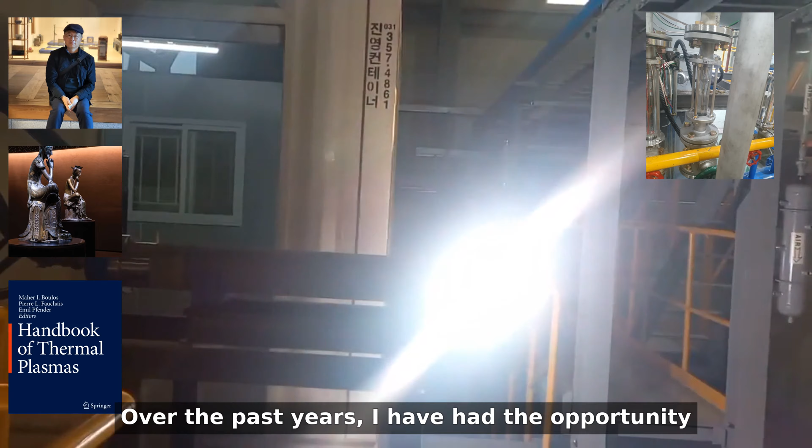Over the past years, I have had the opportunity to design and operate a high-power arc plasma smelting system based on a 700 kilowatt, 22,500 volt direct current arc plasma configuration. This system was successfully deployed in the Republic of Korea, where platinum group metal-bearing ores were directly smelted using plasma energy.

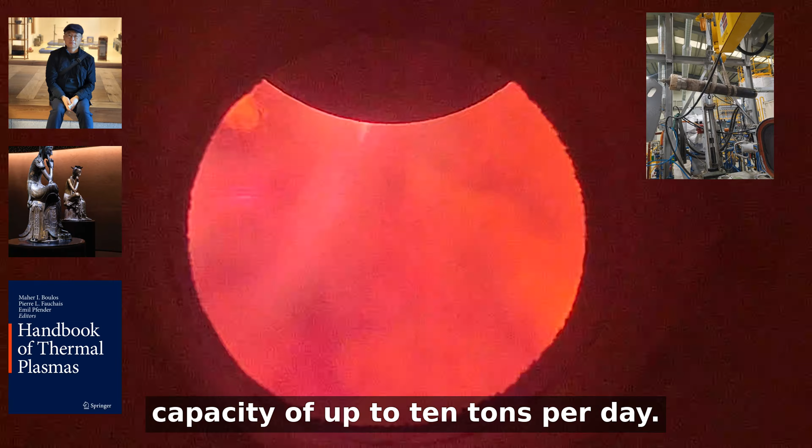Unlike conventional batch melting processes, the system was engineered for continuous smelting operation, enabling a designed processing capacity of up to 10 tons per day.

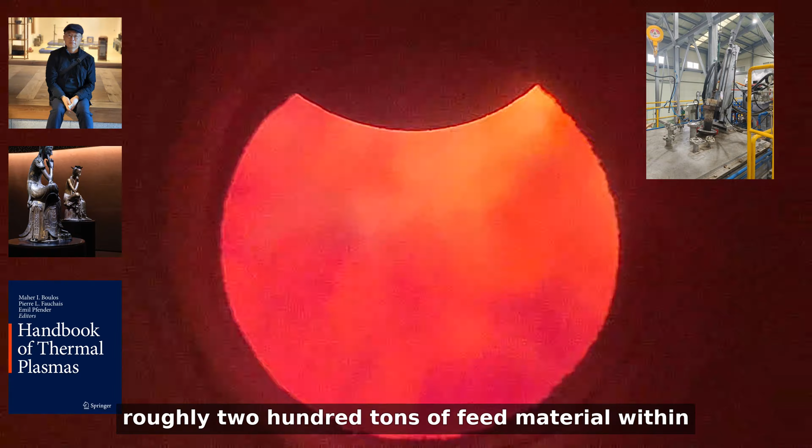The furnace was operated in campaigns of approximately 20 continuous days per month, demonstrating the capability to process roughly 200 tons of feed material within a single operational period and produce concentration-enriched PGM ingots.

While large-scale commercial production still requires further investment and expansion, the technical feasibility has already been validated.

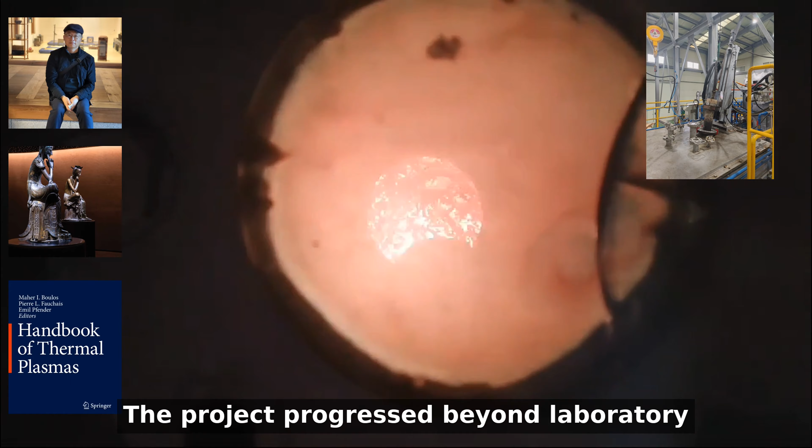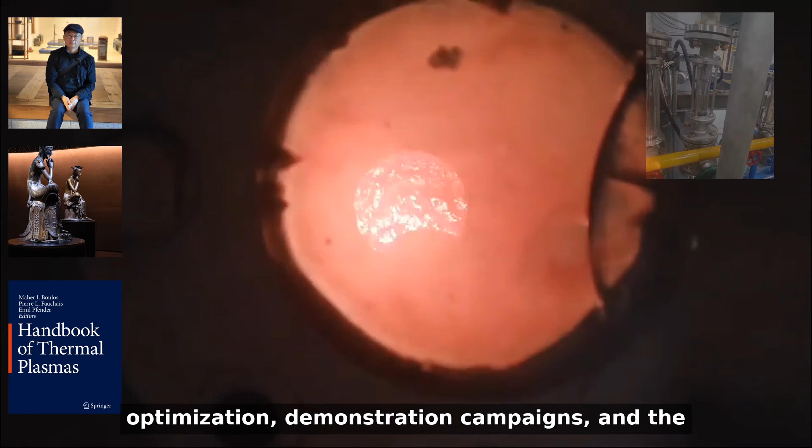The project progressed beyond laboratory experimentation into pilot industrial operation, including plant construction, system optimization, demonstration campaigns, and the successful production and sale of approximately 100 kilograms of PGM ingots.

This experience confirmed not only the scientific validity of plasma smelting, but also its practical industrial potential.

Building upon these results, my current focus is the design of a fully robotic, mobile, and modular plasma smelting system. The objective is to create scalable metallurgical platforms that can be deployed rapidly, operate autonomously, and dramatically reduce infrastructure constraints traditionally associated with high-temperature refining facilities.

With the collaboration and support of entrepreneurs and investors around the world, this technology has the potential to fundamentally change how critical metals are produced.

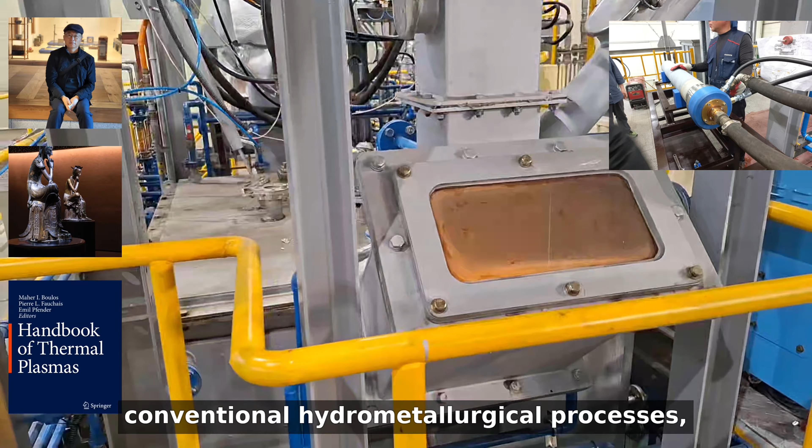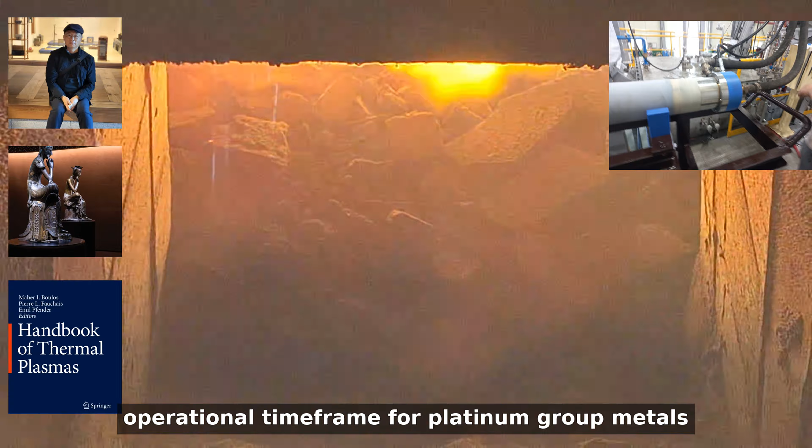Without relying on chemical reagents and avoiding the environmental burdens of conventional hydrometallurgical processes, plasma smelting may enable production rates that are at least 10 times, and potentially up to 100 times, greater within the same operational time frame for platinum group metals and rare earth elements.

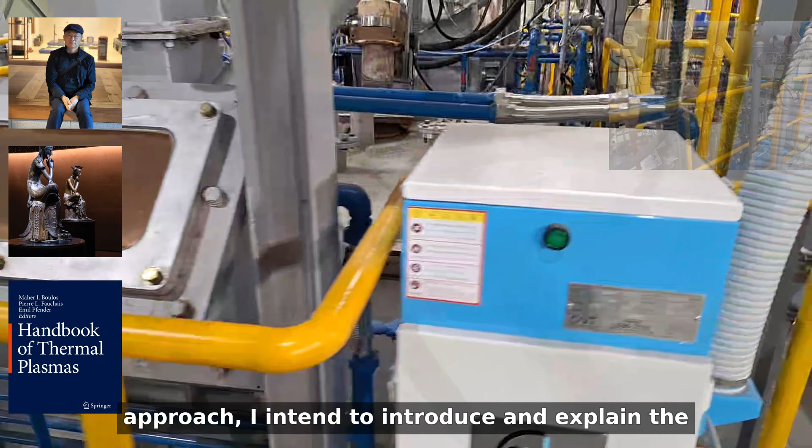To help a broader audience understand the scientific and industrial foundations of this approach, I intend to introduce and explain the technology based on the principles presented in the Handbook of Thermal Plasmas, making its possibilities accessible to engineers, investors, and curious minds alike. The material may appear highly technical at times.

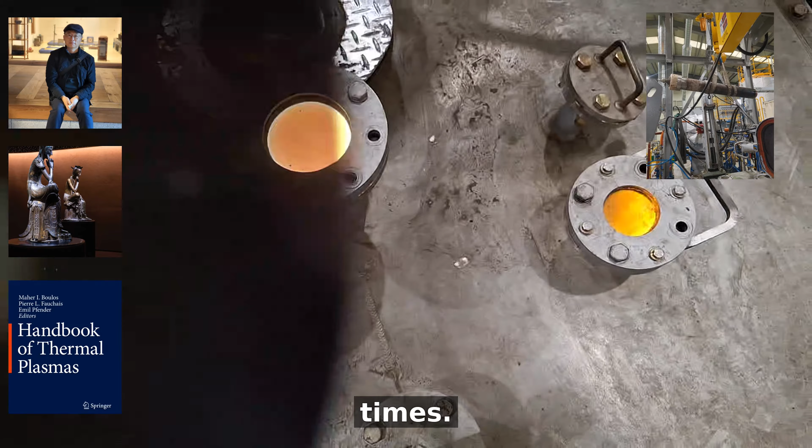Nevertheless, I hope readers will revisit it more than once and find the process both rewarding and intellectually enjoyable as understanding deepens. If this vision resonates with you, I warmly invite your interest and communication.

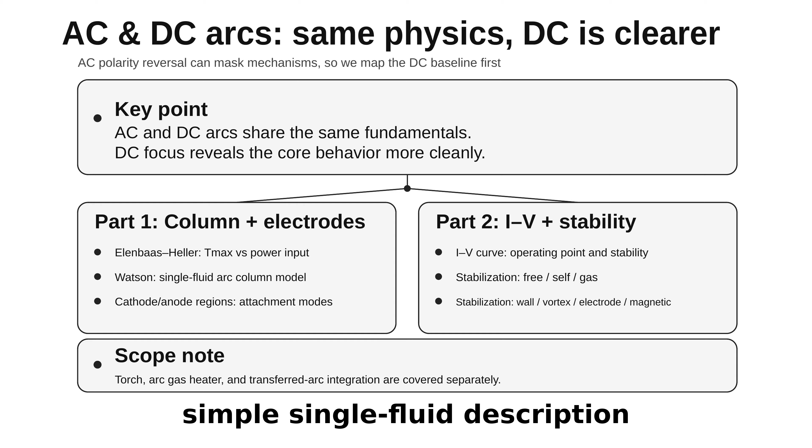Part 1 of this video focuses on the arc column and the electrode regions. The Elenbaas-Heller model helps extract trends, including feasible maximum temperature versus power input. The Watson model provides a simple single-fluid description of arc column behavior, but is not introduced here for simplicity. This part also separates cathode and anode regions and highlights different current attachment mechanisms.

Part 2 shifts to the current-voltage characteristics and electrical stability. The IV curve ties the operating point to stability and control choices. Stabilization options range from free-burning and self-stabilized arcs to gas, wall, vortex, electrode, and magnetic stabilization.

Finally, integration into plasma devices such as arc gas heaters, plasma torches, and transferred arcs is treated as a dedicated follow-on topic.

This slide sets the baseline for understanding the arc column and the electrode regions in a thermal arc. In the arc core, the plasma state generally approaches local thermodynamic equilibrium, meaning both kinetic and chemical equilibrium are reasonable approximations.

The main departures from local thermodynamic equilibrium are expected at the arc fringes and in regions influenced by a cooled wall. When the arc operates in a high-intensity regime, the conditions commonly include currents above 100 amperes and pressures above 10 kilopascals. Under these conditions, the arc behaves closer to a thermal plasma in the classical sense. As pressure drops, the electron temperature and the heavy particle temperature can diverge, and the arc becomes more non-equilibrium.

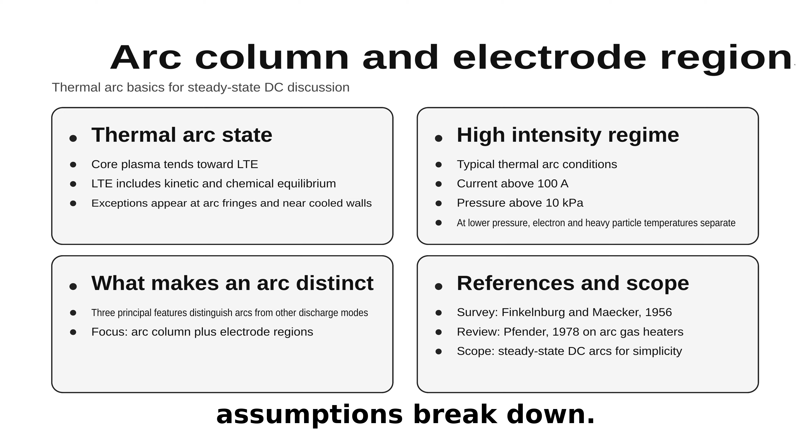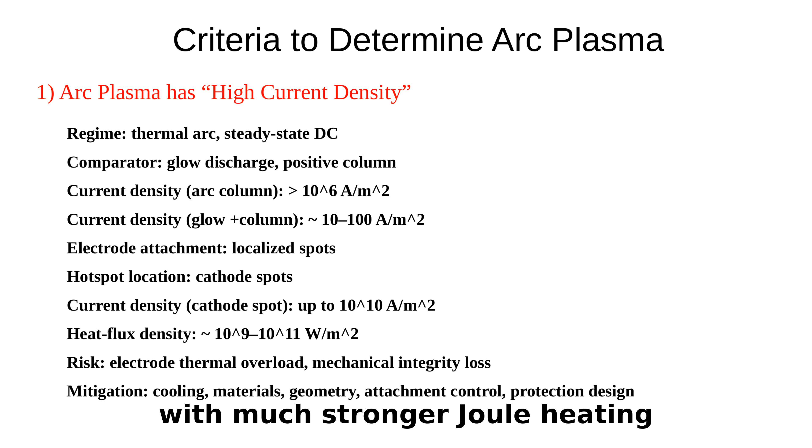An arc is a high current density discharge, and that intensity becomes most extreme at the electrodes. The current density in the arc column can exceed 10 to the 6th amperes per square meter. That number matters because it is not a small increment over other discharges. It is a different regime of energy delivery into the plasma, with much stronger Joule heating and stronger coupling between the electrical circuit and the thermal state of the column.

The comparison baseline is the positive column of a glow discharge. Typical glow positive column current densities are around 10 to 100 amperes per square meter. So even before looking at electrodes, the arc column already sits orders of magnitude above the glow regime.

Then the electrode attachment makes the contrast even more pronounced. An arc can attach to an electrode, especially to the cathode, as tiny spots rather than as a broad uniform contact area. When the same current is forced through a very small attachment area, the local current density can rise dramatically, reaching about 10 to the 10th amperes per square meter in those cathode spots. That localization immediately translates into extreme thermal loading.

The associated heat flux densities can sit around 10 to the 9th up to 10 to the 11th watts per square meter. At those levels, the electrode is not just getting warm. Without design precautions, the electrode can lose mechanical integrity through melting, erosion, cracking, or structural weakening.

So the practical engineering consequence is straightforward. If a device relies on arc attachment at electrodes, the electrode design and its cooling, materials, geometry, and attachment control must be treated as a primary reliability problem, not as a secondary detail.

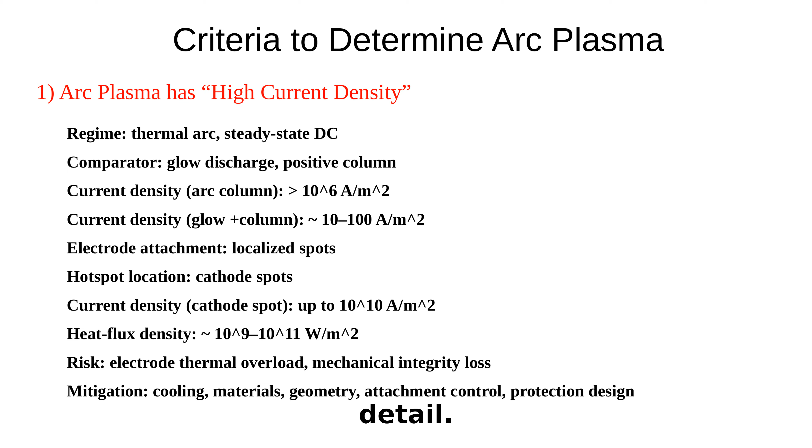For an arc, the cathode fall is around 10 volts, whereas glow discharges typically show cathode falls above 100 volts. This relatively low cathode fall follows from more efficient electron emission mechanisms at the cathode in an arc.

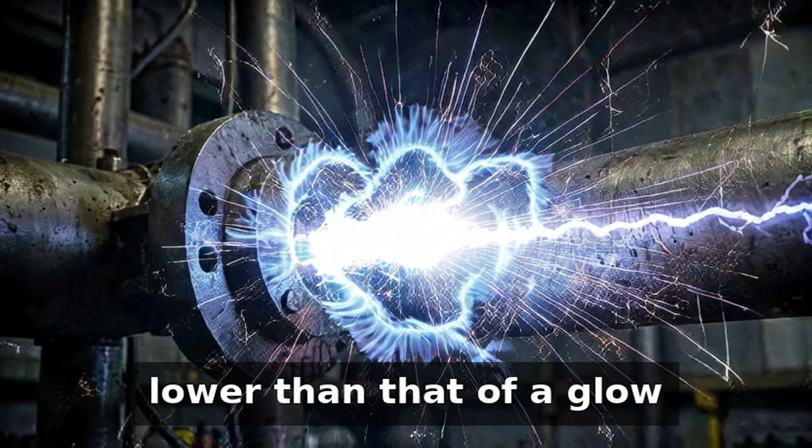Even if the overall arc voltage in a given discharge vessel is lower than that of a glow discharge in the same vessel at the same pressure, the total voltage drop is not a reliable criterion. Depending on arc length and the energy balance of the arc column, the overall voltage drop of an arc can still be very high.

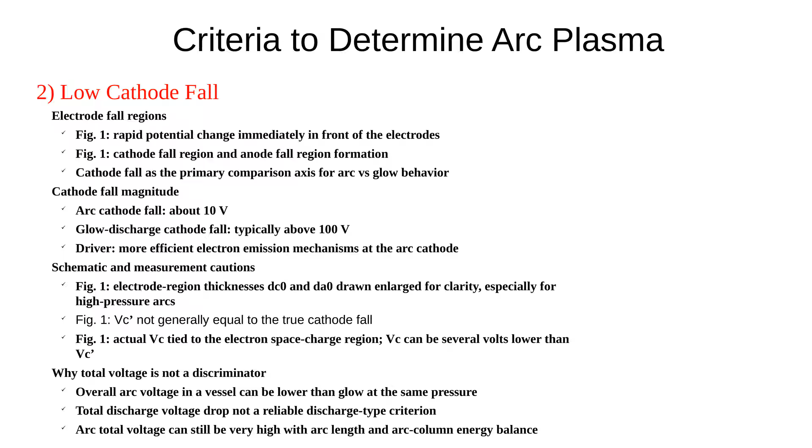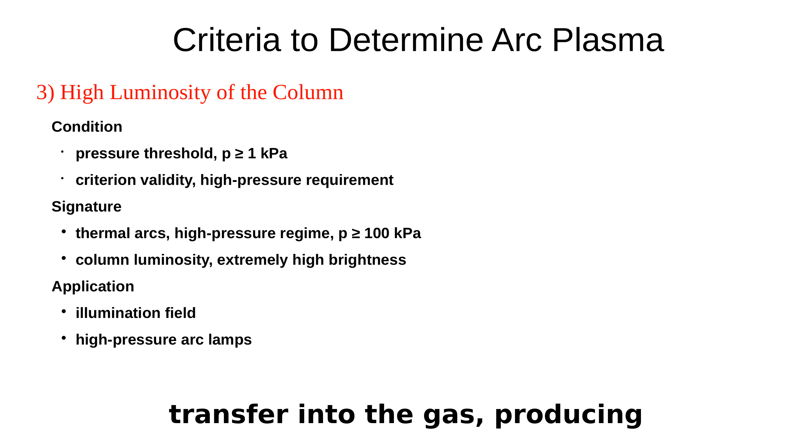At sufficiently high pressure, column brightness becomes a reliable way to tell an arc apart from other discharge modes. The key requirement is pressure P at or above 1 kPa. Pressure matters because it sets the gas density, and gas density controls how often particles collide. More collisions make it easier for electrical energy to transfer into the gas, producing strong excitation and light emission that a human eye can clearly notice.

In the high-pressure thermal arc regime, roughly P at or above 100 kPa, the arc column can become extremely luminous. Thermal arc means the plasma is strongly heated and behaves closer to a thermalized state than low-pressure discharges. In simple terms, the arc column becomes a very bright, concentrated light source because excited atoms and ions relax and emit radiation efficiently under frequent collisions.

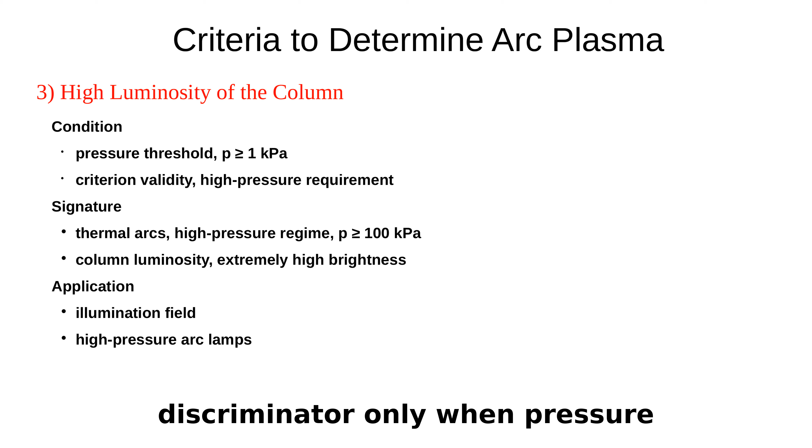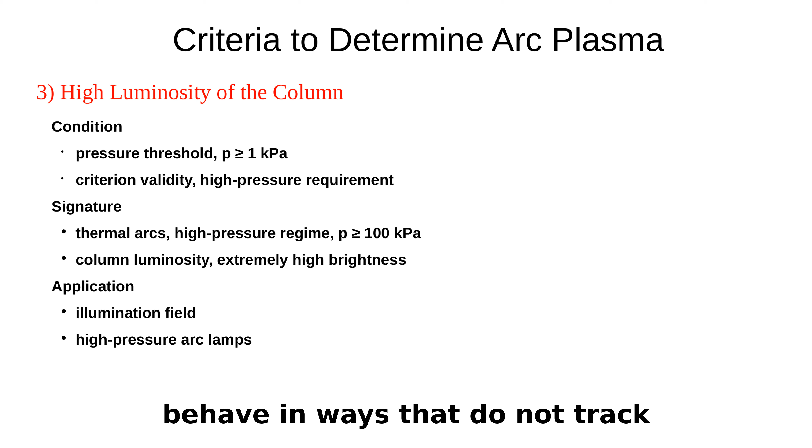This is why the luminosity criterion works as a discriminator only when pressure is sufficiently high. At lower pressure, electrons and heavy particles can be at very different temperatures, collisions are less frequent, and brightness can drop or behave in ways that do not track the discharge mode cleanly. So brightness alone stops being a dependable label in low-pressure conditions.

Because the column luminosity becomes extremely high in high-pressure thermal arcs, the same property is directly useful in practice. The illumination field is an obvious example, where the arc column's intense light output is exploited in high-pressure arc lamps and related light source technologies.

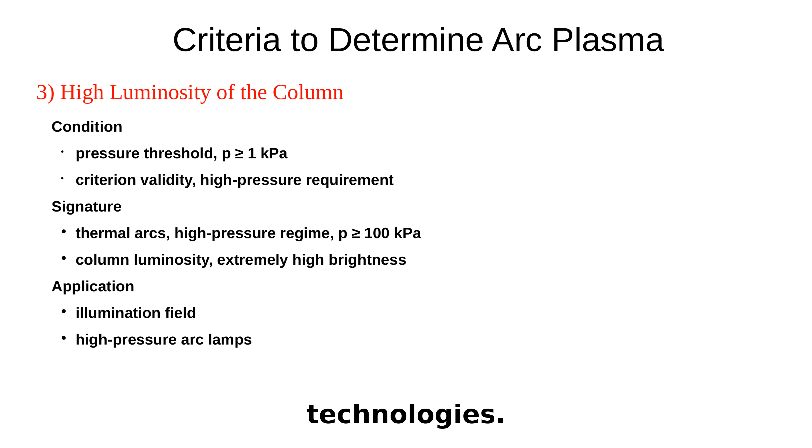Cathode and anode regions can be treated as thin boundary layers that sit directly on top of the electrodes. These boundary layers are where the most abrupt electrical changes happen, because space charge can exist right in front of the surfaces. Figure 1 highlights that contrast by separating the electrode-adjacent fall regions from the arc column itself.

The arc column forms the main body of the arc and typically has a comparatively small potential gradient. Potential gradient is simply how fast the electric potential changes with distance. A small potential gradient means the column does not need a steep voltage slope per unit length to carry the imposed current. Unlike the electrode-adjacent regions, the arc column behaves like true plasma where quasi-neutrality prevails.

Quasi-neutrality means the densities of positive and negative charges are nearly equal, so the net charge is close to zero over most of the column volume. That is why the column is often modeled with plasma transport and energy balance ideas, while the electrode boundary layers require special treatment for space charge and emission physics.

Pressure in the arc column is usually uniform and essentially equal to the surrounding fluid pressure. A notable exception appears at extremely high current levels, I greater than 5,000 ampere. In that regime, the current generates its own magnetic field, and the interaction of current and magnetic field produces an inward magnetic force. This magnetic squeezing is the pinch effect, and it creates a radial pressure gradient that raises the pressure on the arc axis.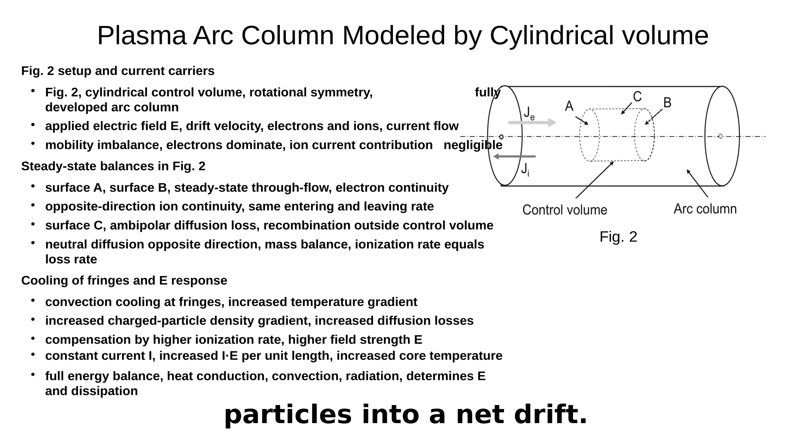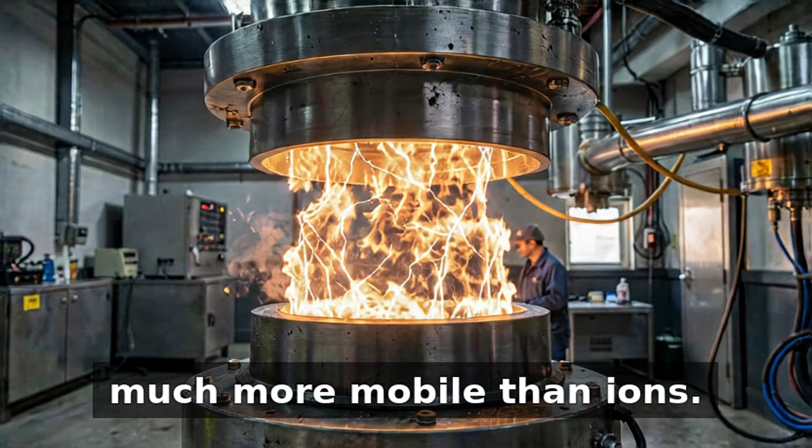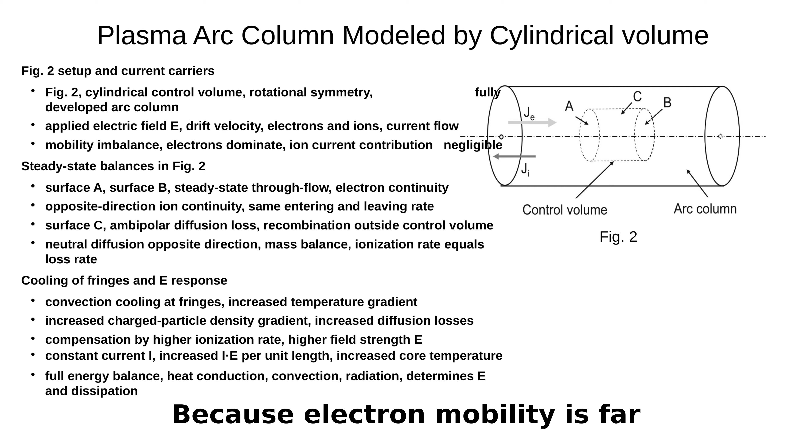Inside Figure 2, the applied electric field E pushes charged particles into a net drift. Drift means a small average motion superimposed on random thermal motion. Both electrons and ions drift, but electrons usually dominate the current because they are much more mobile than ions. Mobility is the ease with which a particle accelerates and responds to an electric field while colliding with the background gas. Because electron mobility is far higher, the ion contribution to the total current flow is often negligible compared to electrons in the arc column.

Steady state in Figure 2 means no net accumulation inside the control volume. For electrons, the same number entering through surface A per unit time must leave through surface B. For ions, the same idea holds but with the flow direction reversed.

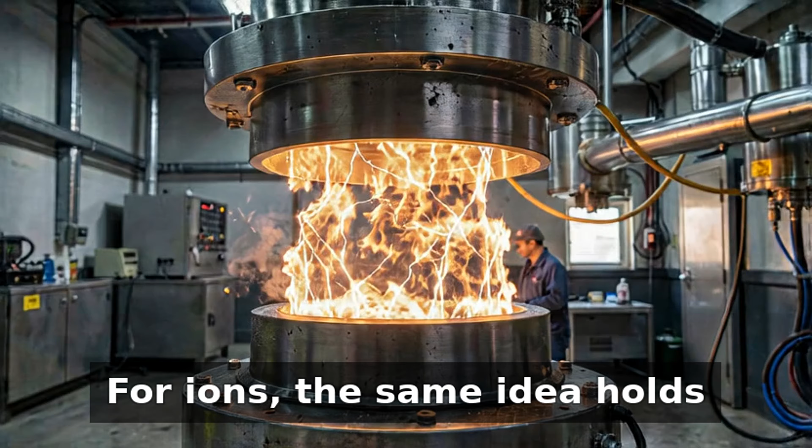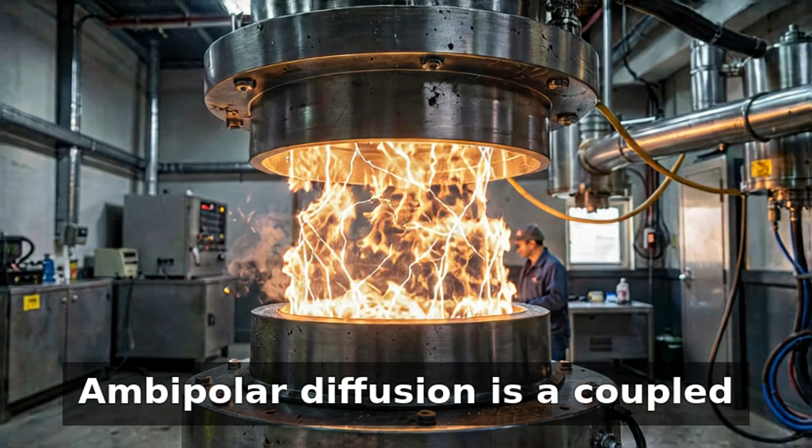That simple through-flow picture is not the whole story, because charge carriers also leak out sideways. Across surface C, electrons and ions are continuously lost by ambipolar diffusion. Ambipolar diffusion is a coupled diffusion process. Electrons and ions diffuse together to preserve quasi-neutrality, rather than separating strongly. Outside the control volume, those escaped charge carriers recombine, meaning electrons and ions meet and neutralize. When charged particles diffuse out through surface C, the plasma loses charge carriers.

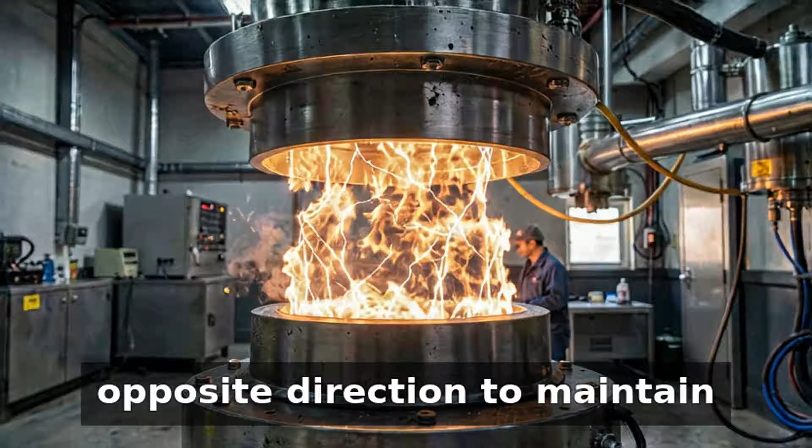To keep steady state, the arc column must replace those lost carriers inside the control volume. That replacement requires ionization of neutral particles at the same rate as the loss. At the same time, neutral particles diffuse in the opposite direction to maintain mass balance in the control volume.

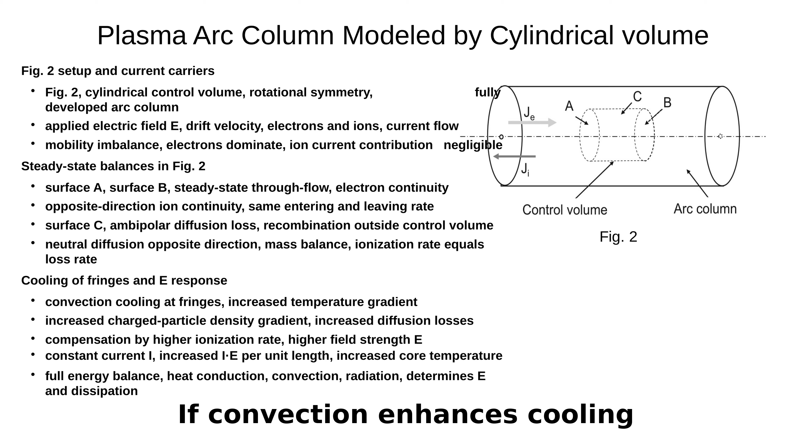Cooling at the arc fringes changes that balance in a counterintuitive way. If convection enhances cooling near the edges, the temperature gradient becomes steeper, and the charged particle density gradient also becomes steeper. Steeper gradients drive stronger diffusion, so charge carriers are lost faster across surface C.

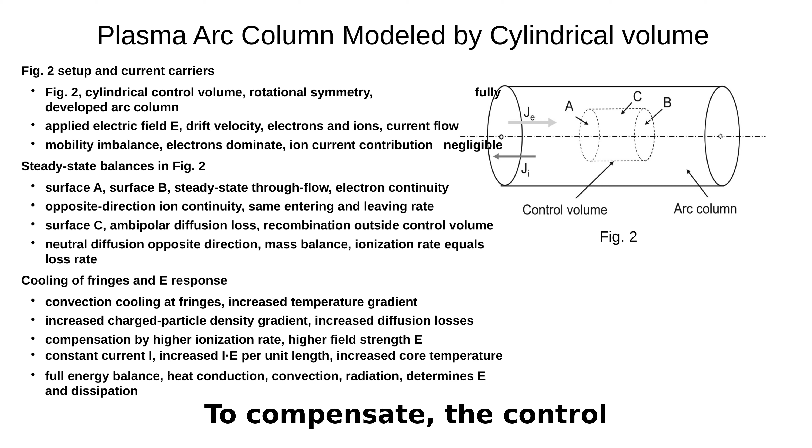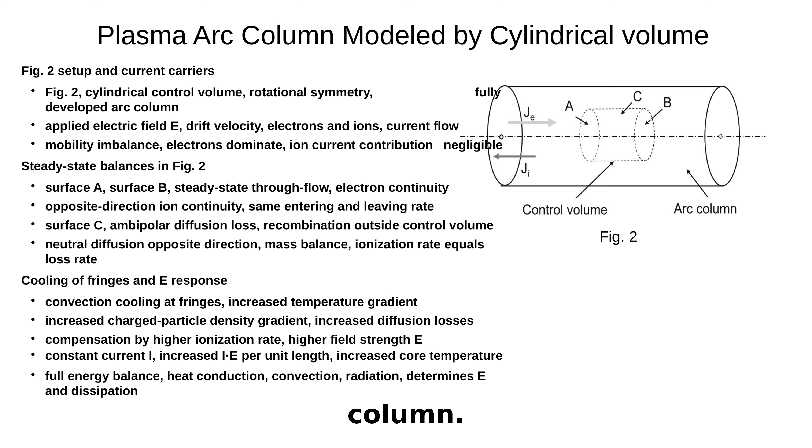To compensate, the control volume needs a higher ionization rate, and that typically demands a higher field strength E. With the current I held constant, increasing E increases the energy dissipation per unit length, I times E, which raises the core temperature of the arc column. So stronger fringe cooling can lead to a hotter core when the current is fixed.

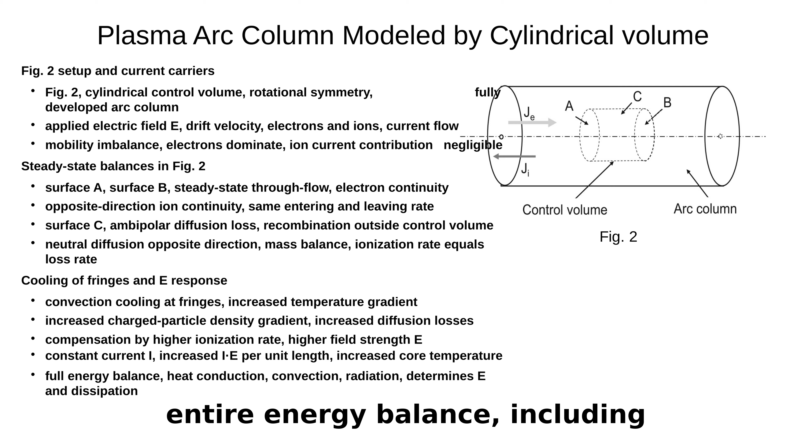A final caution is that charge carrier losses are only part of the full energy picture. The actual E or power dissipation is determined by the entire energy balance, including heat conduction, convection, and radiation losses.

Ionization in an arc column is usually dominated by electron impact, meaning an electron collision provides the energy needed to ionize a neutral atom. In high-pressure arcs with P greater than 10 kPa, the mean free path of an electron is short because collisions are frequent.

In that situation, charge carrier production must rely more on thermal ionization than on direct field-driven acceleration. Only the high-energy tail of the Maxwellian electron energy distribution has enough energy to make ionizing collisions.

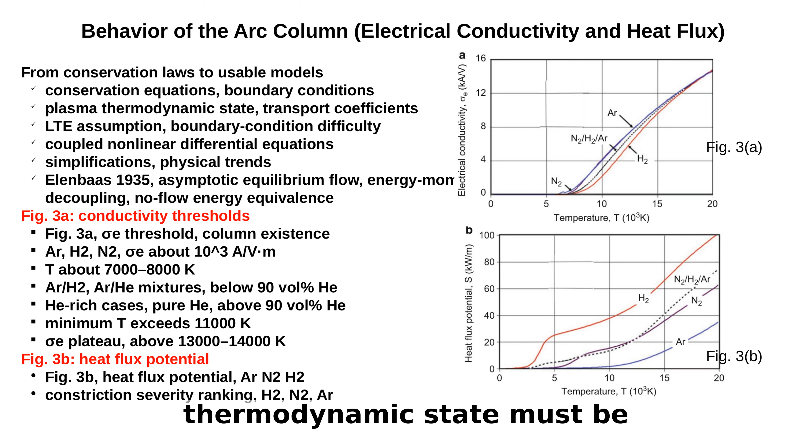Arc column behavior can be computed in principle by solving the conservation equations, but only after two hard prerequisites are met. The thermodynamic state must be known, and the transport coefficients must be available.

Transport coefficients are the material properties that convert gradients into fluxes, such as electrical conductivity, viscosity, thermal conductivity, and diffusion coefficients.

Even if local thermodynamic equilibrium is assumed inside the arc column, realistic boundary conditions remain a major obstacle. Boundary conditions encode how the plasma interacts with electrodes, walls, and inflow or outflow, and these interfaces are exactly where many non-ideal effects concentrate.

On top of that, the governing equations form a coupled set of nonlinear differential equations, which is mathematically stiff and computationally expensive. Because of those constraints, the standard strategy is to introduce controlled simplifications. A simplified model rarely reproduces the exact arc column behavior, but it often exposes trends that stay valid across many operating conditions.

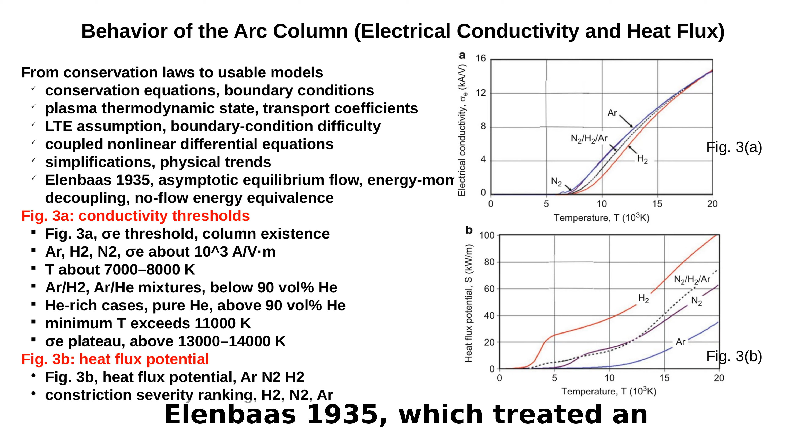The historical starting point is Elenbaas 1935, which treated an arc column in an asymptotic equilibrium flow regime. That regime decouples the energy equation from the momentum equation, and from the energy point of view it becomes equivalent to the no-flow case. This decoupling is valuable because it isolates thermal balance without needing the full momentum coupling to extract first-order behavior.

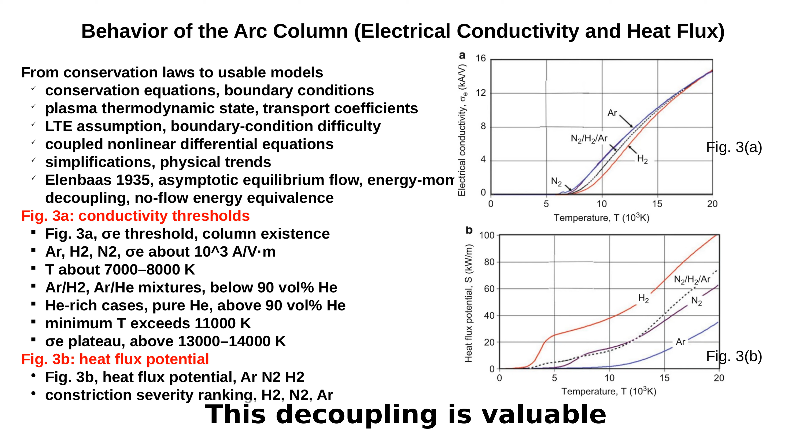Figure 3a then provides a key existence constraint through electrical conductivity, sigma. For argon, hydrogen gas, and nitrogen gas plasmas, the column cannot exist below sigma about 10 cubed ampere per volt-meter, which corresponds to temperatures around 7000 to 8000 Kelvin.

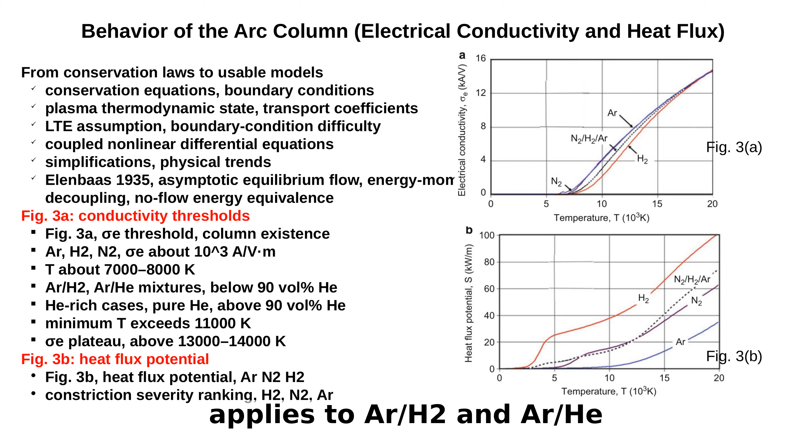The same lower limit also applies to argon and hydrogen gas and argon/helium mixtures, at least when the helium content is below 90 vol% helium.

Helium-rich cases behave differently. For pure helium, or mixtures above 90 vol% helium, the minimum temperature for sustaining the column must exceed 11,000 Kelvin. Figure 3a also shows a saturation-like trend.

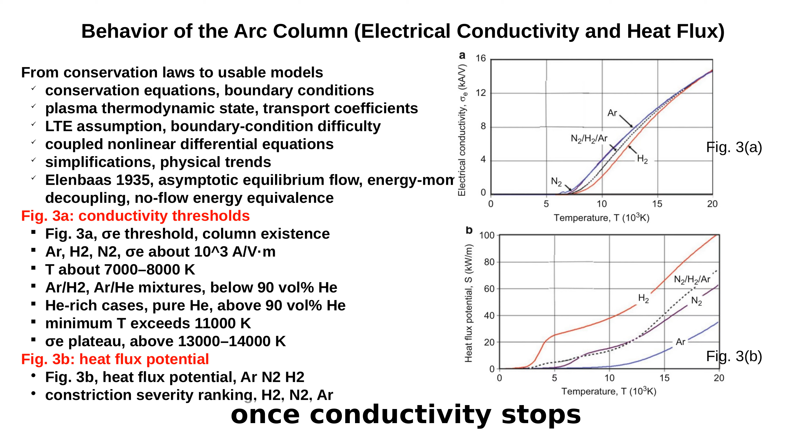Sigma does not change much above about 13,000 to 14,000 Kelvin. That plateau matters because once conductivity stops increasing, raising temperature further stops being an efficient way to reduce electrical resistance for a fixed current.

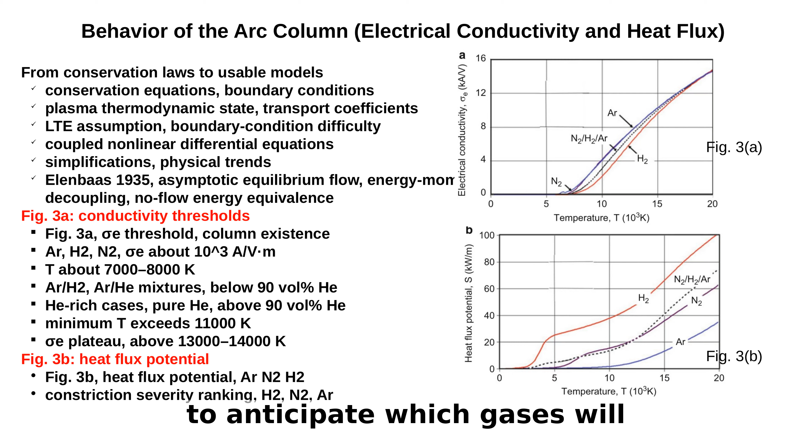Figure 3b adds a gas-dependent severity ranking via the heat flux potential. For argon, nitrogen gas, and hydrogen gas, Figure 3b indicates that constriction becomes most severe for hydrogen gas, less severe for nitrogen gas, and least severe for argon. This ordering is a compact way to anticipate which gases will demand more aggressive stabilization or cooling management for the same current and geometry.

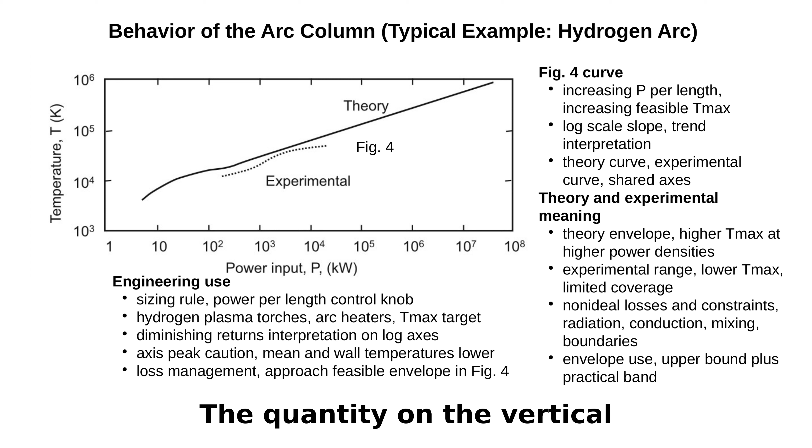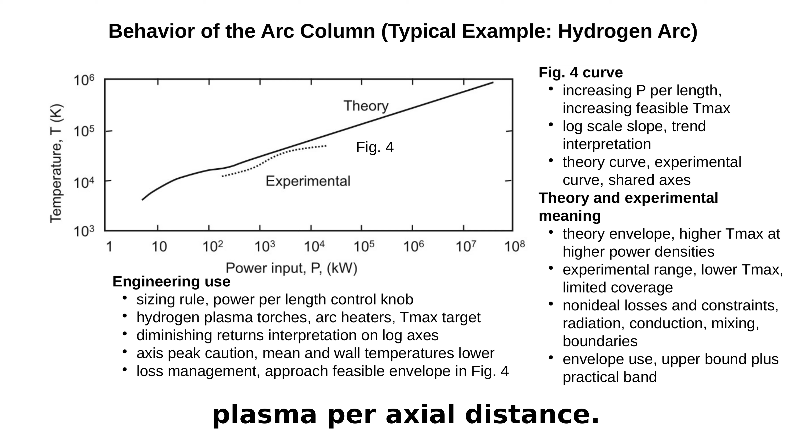Figure 4 frames a practical upper limit for temperature in a hydrogen arc by focusing on the axis, where the arc core is hottest. The vertical axis is the highest feasible on-axis temperature T, measured in Kelvin. The horizontal axis is the power input per unit length, capturing how aggressively energy is deposited into the plasma per axial distance. Both axes are shown on logarithmic scales, so equal spacing corresponds to multiplication by 10, not addition.

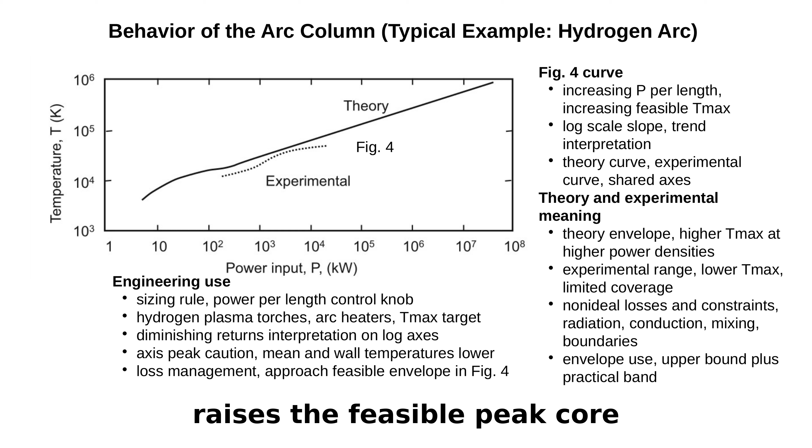A rising curve on a log axis signals a scaling rule. Increasing power per unit length raises the feasible peak core temperature, but the gain per decade can change across the range. Figure 4 also separates a theoretical envelope from experimental observations. The theoretical curve extends to higher power densities and indicates how high the on-axis temperature could be in an idealized setting. The experimental points sit lower and span a narrower range, reflecting practical constraints that reduce achievable temperature.

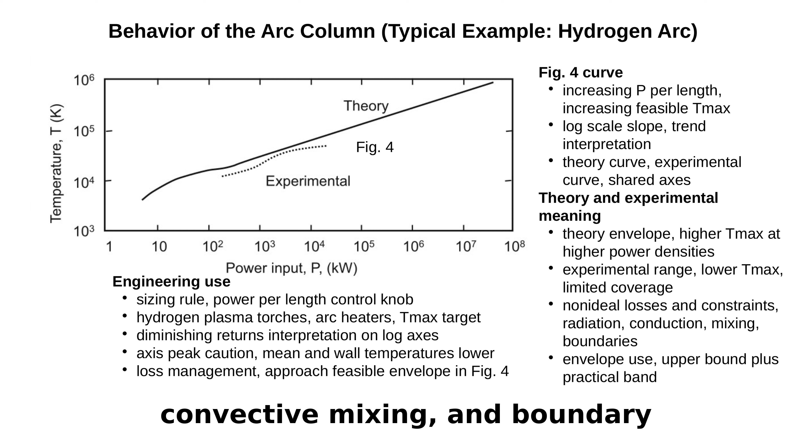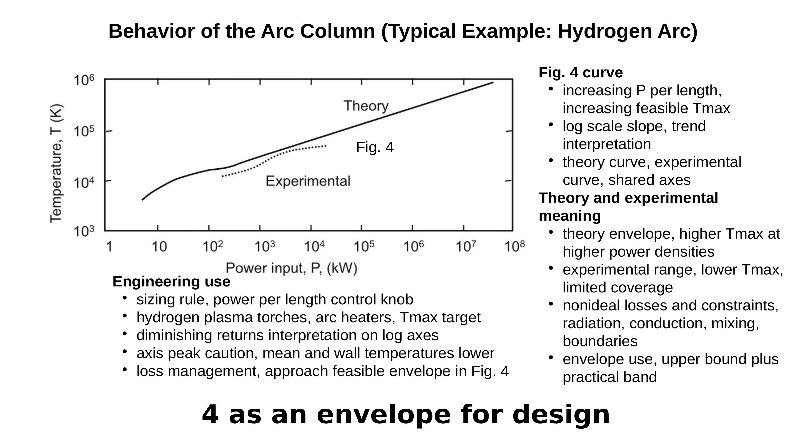Those constraints typically include radiative losses, heat conduction to cooler regions, convective mixing, and boundary interactions that are not fully captured by simplified theory. The key engineering interpretation is to treat Figure 4 as an envelope for design decisions. The curve provides a ceiling for axis temperature at a given power per unit length, and the experimental band indicates a more realistic operating region.

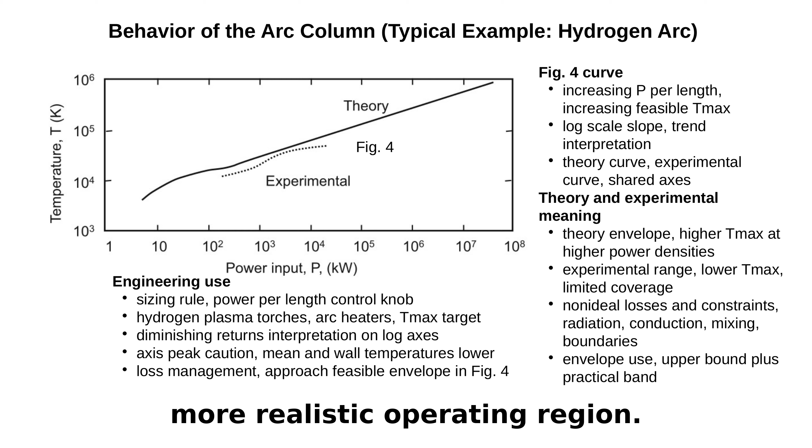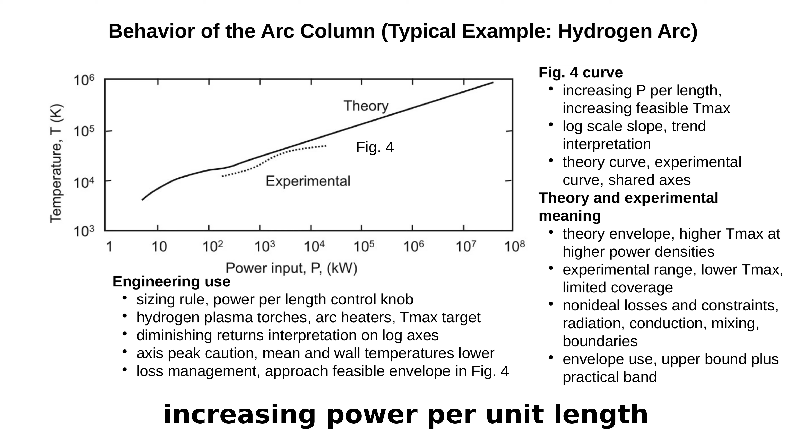Axis temperature is a peak value, not a cross-section average, so average plasma temperature and near-wall temperature can be substantially lower. For hydrogen plasma torches and arc heaters, Figure 4 provides a compact sizing relationship. Increasing power per unit length pushes the core hotter, while loss management determines how close operation approaches the feasible envelope.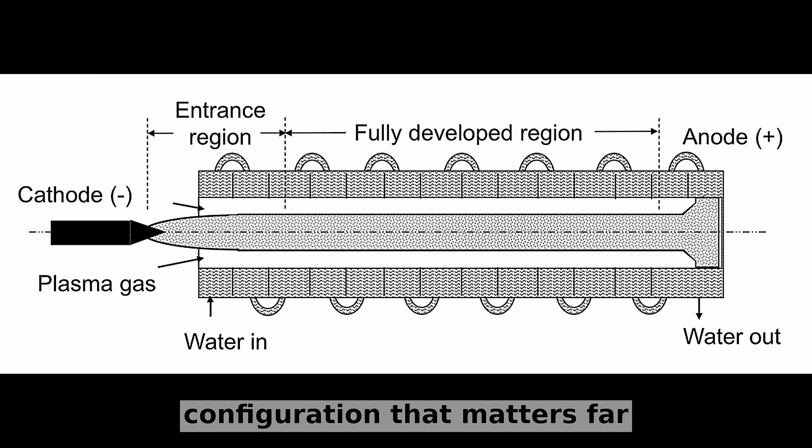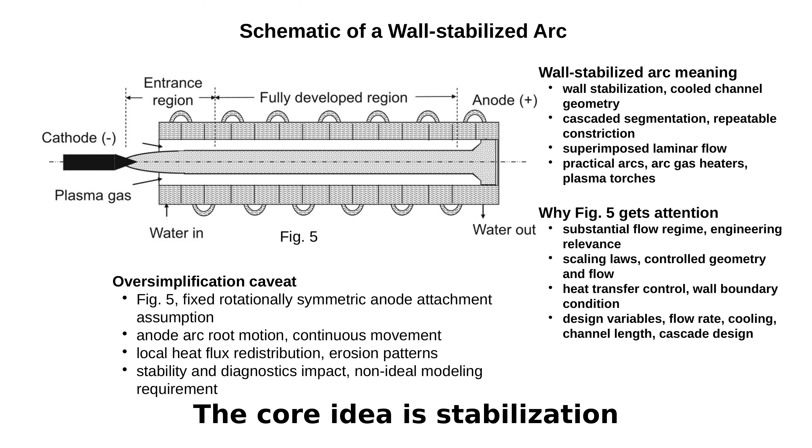Figure 5 captures a practical arc configuration that matters far more in engineering hardware than in a quiet laboratory setup: a wall-stabilized arc operated with a strong superimposed gas flow. The core idea is stabilization by geometry and cooling. Instead of letting the arc column wander freely, the arc is forced to live inside a cooled channel made of many short, cascaded segments. That cooled wall acts like a physical constraint, shaping the column and making the arc behavior more repeatable.

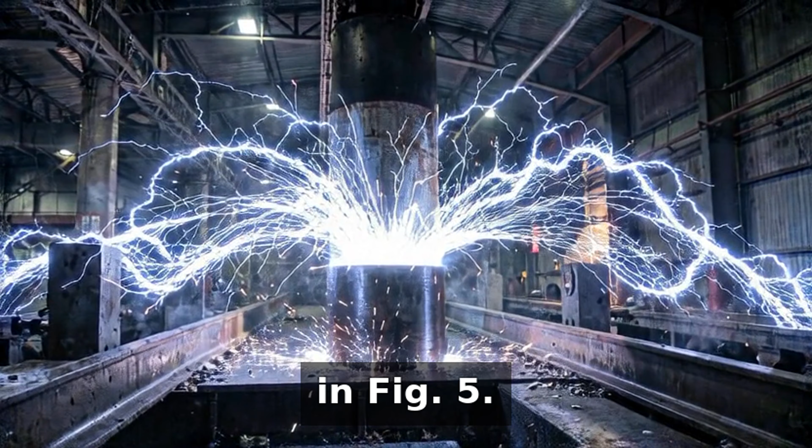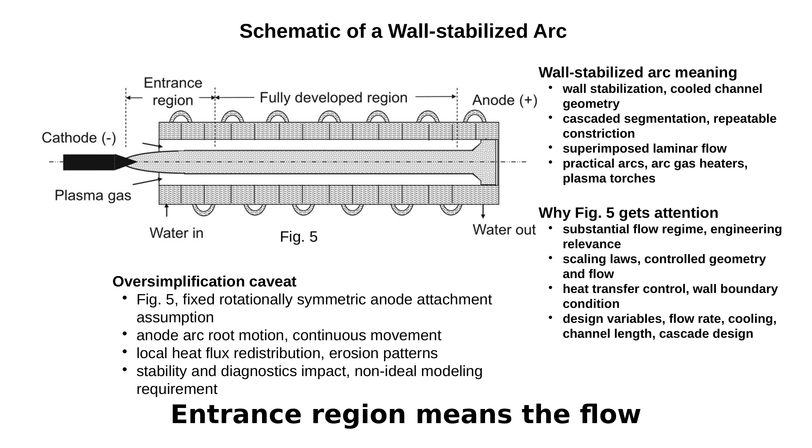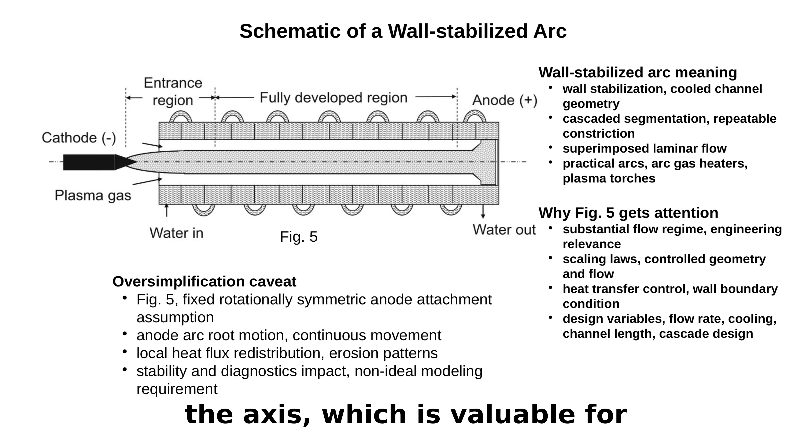Axial flow is the second lever in Figure 5. Plasma gas is driven from the cathode side toward the anode side, passing through an entrance region and then a fully developed region. Entrance region means the flow and temperature fields are still forming and adjusting. Fully developed region means the profiles have largely settled into a consistent shape along the axis, which is valuable for analysis and for applying scaling laws.

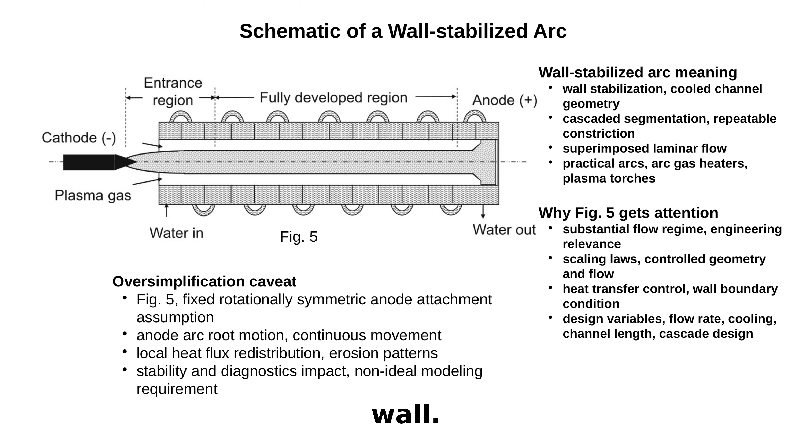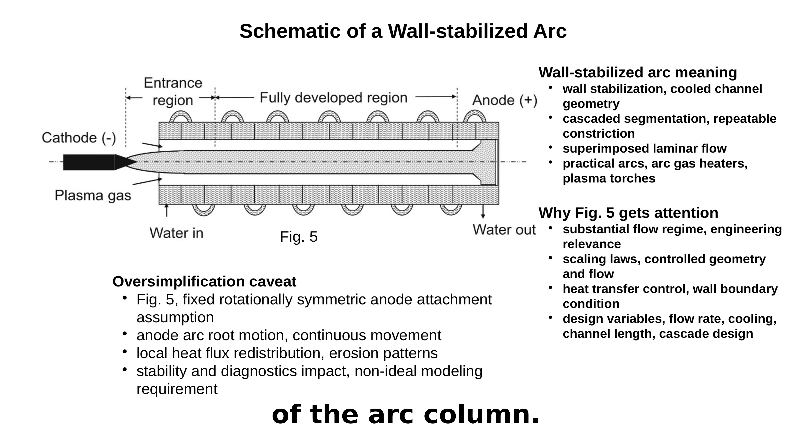Laminar flow is emphasized because it is orderly and predictable, so it supports cleaner comparisons when power, geometry, or flow rate is changed. Water cooling shown in Figure 5 is not a minor detail. Water in and water out represent active heat extraction along the wall. That heat extraction sets the wall temperature boundary condition and strongly influences column constriction, heat transfer, and the stability of the arc column. In arc gas heaters, the whole point is controlled energy transfer into the flowing gas, so the coupling among gas flow, wall cooling, and electrical power is the central design problem.

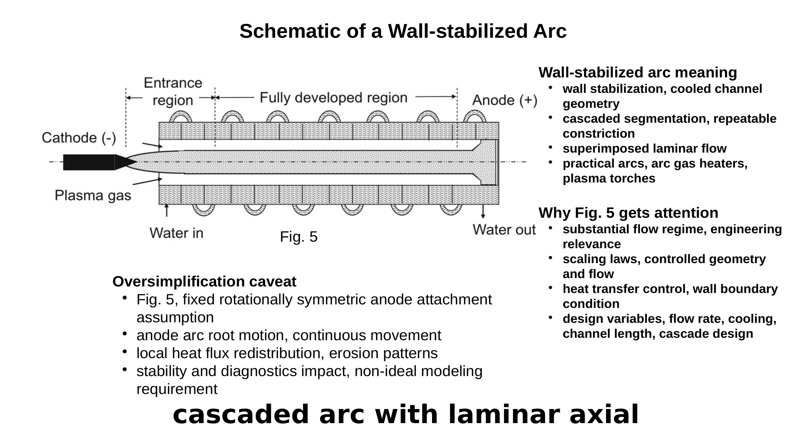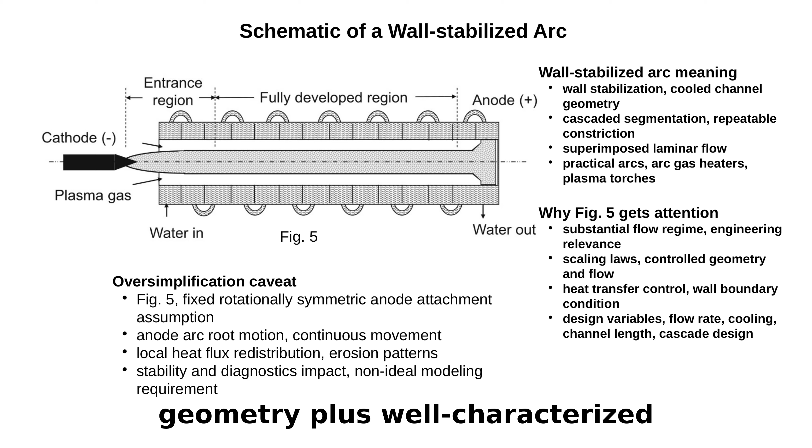The reason the wall-stabilized cascaded arc with laminar axial flow receives special attention is the opportunity to apply scaling laws. Scaling laws are simplified relationships that let a designer predict how key outputs change when size, flow, or power is scaled up or down. A stabilized, repeatable geometry plus well-characterized flow makes those relationships more trustworthy than in free-burning arcs.

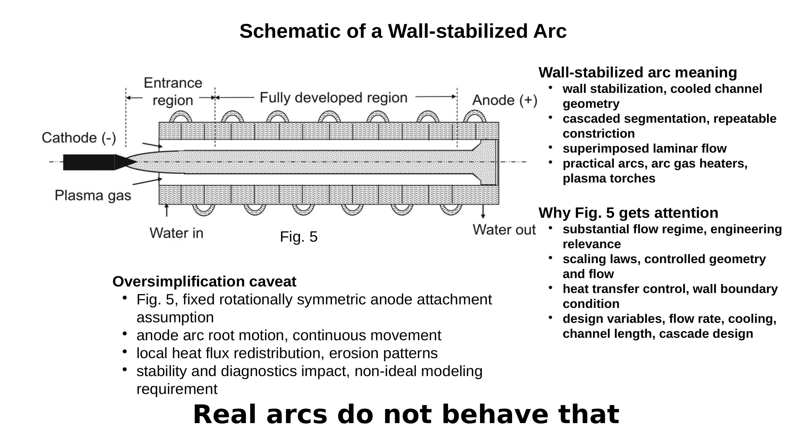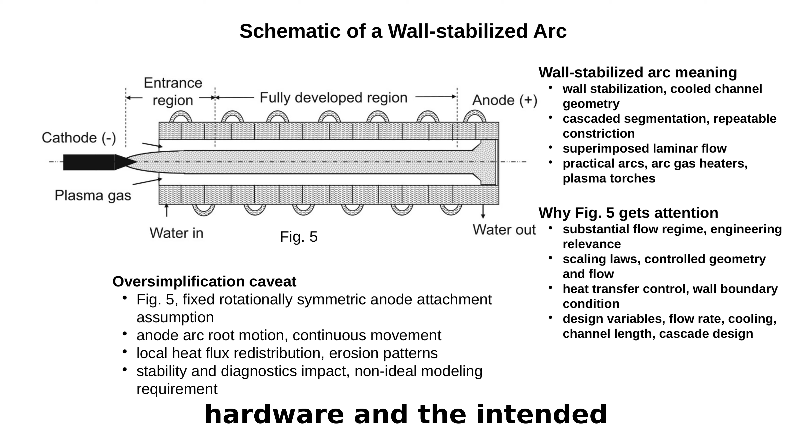A critical caution is embedded in the way Figure 5 is drawn. Figure 5 assumes the arc attachment at the anode is fixed and rotationally symmetric. Real arcs do not behave that politely. The arc root typically moves continuously over the anode surface, which redistributes local heat flux and changes erosion patterns and stability signatures. So Figure 5 is a useful oversimplified map of the hardware and the intended operating concept, but realistic modeling and diagnostics must treat anode root motion as a key non-ideal effect.